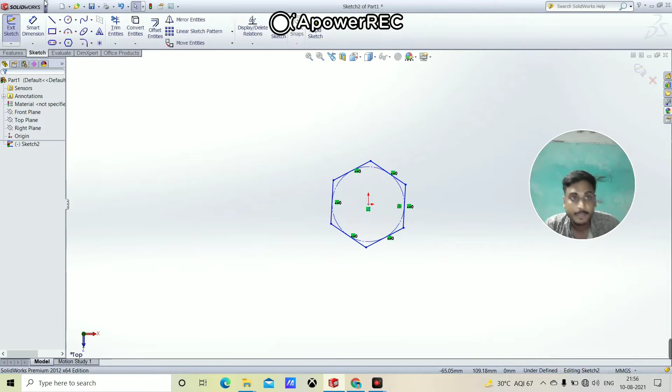At first I have to go to the top plane and select the sketch. I am selecting the hexagon, selecting this line and making it horizontal, then putting the smart dimension of this tool at 19 mm. Okay, it is done.

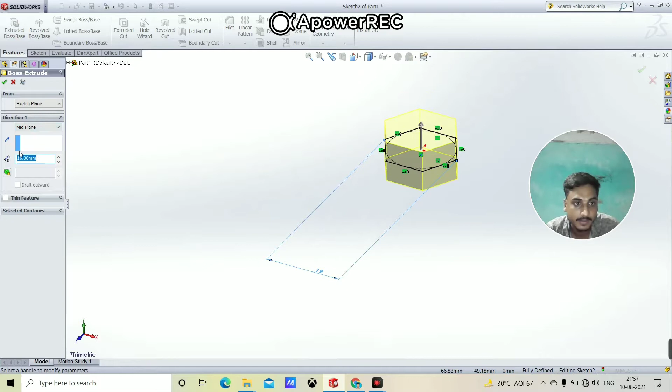Now I am going to extrude it, extruding from blind to mid plane, and the dimension is 7 mm. Okay, it is done.

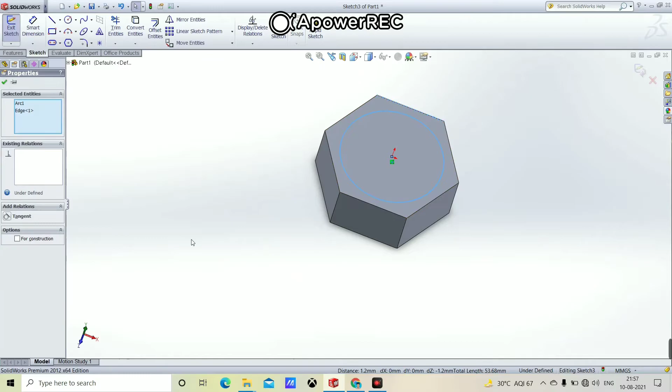Now I am going to the sketch option at this point. I come to the point and make a circle. Now I am selecting the circle and the line and making it tangent. Now I am going to extrude cut and clicking the flip side to cut.

Then click on the draft tool and put it at 60 degrees. Now you can see it.

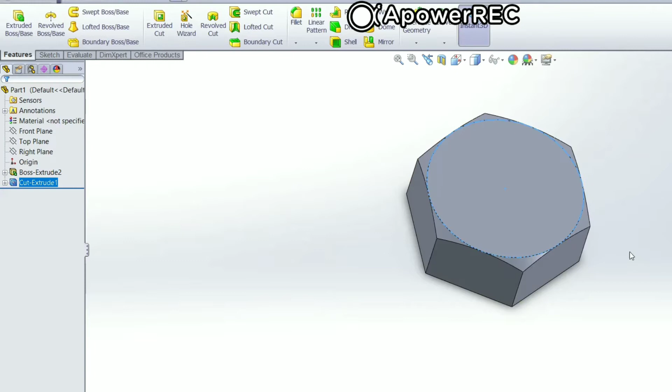It is done. Now I'm going to the back portion and sketch. After sketch, I'm putting a circle inside it and giving it a dimension of 10 mm.

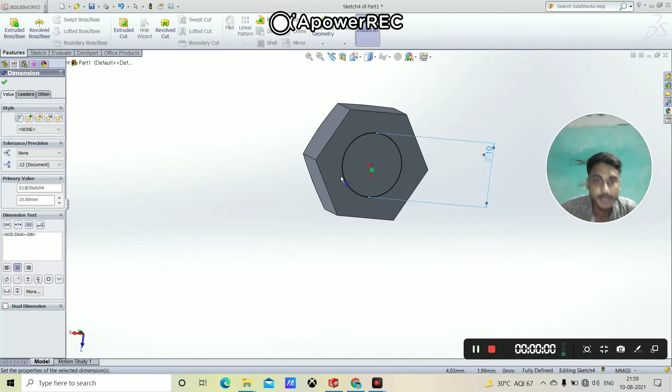I'm going to extrude it. Extrude 45 mm. Okay, it is done at 45 mm.

Now I'm going to the chamfer tool and making a chamfer of 1.5 mm. Done. Now I'm going to put a fillet at this point, 1 mm fillet.

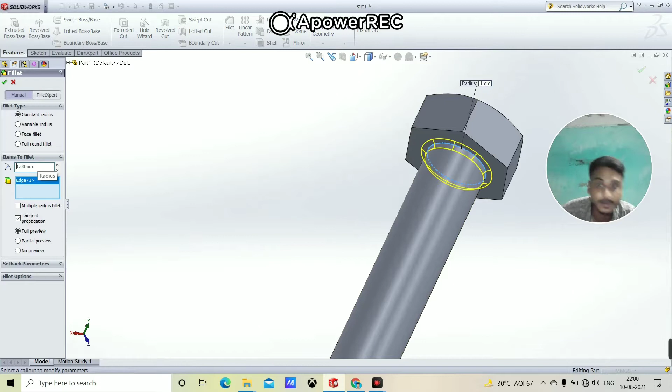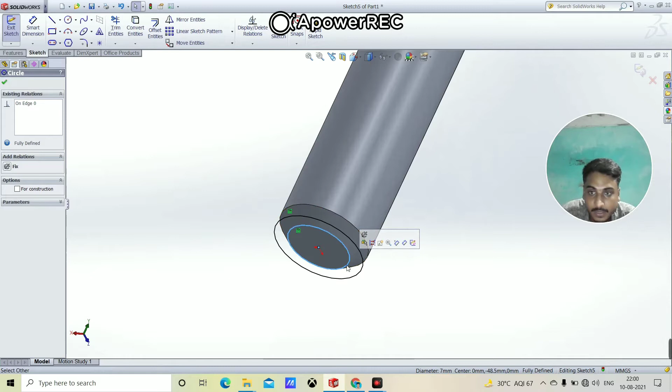Next I have to draw a sketch here and make a convert entities of this point. Okay, done. I mistakenly drew this, not a matter, trim it. Now I have to draw a...

Now I'm going to draw a helix here. I have to draw the helix at height and revolution. Height is 30 mm. At first I have to reverse it and put the pitch of 2 mm. Oh no.

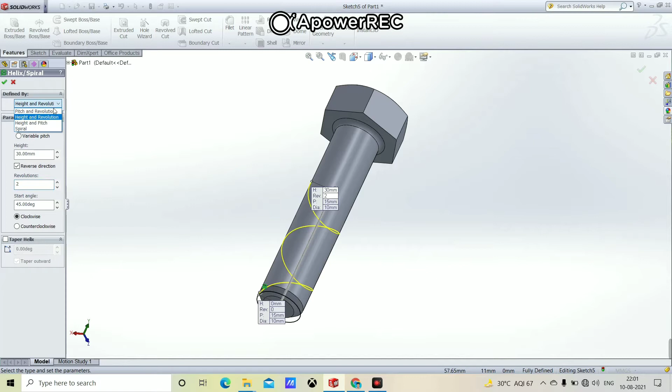I'm making a mistake, height and pitch, sorry. A pitch of 2 mm. Okay, done, so the helix is done.

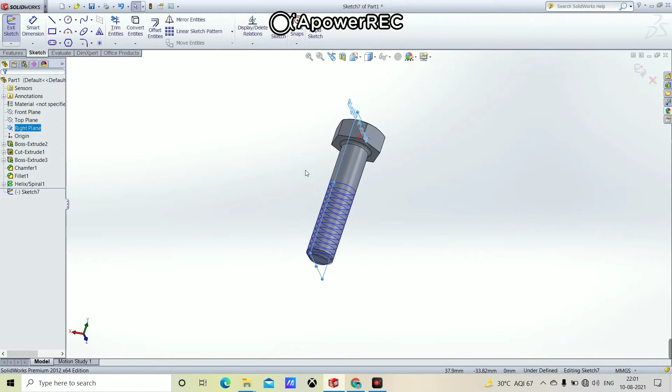Now I have to go to the right plane. Now I am in the right plane. I came to the right plane option and normal.

Now I have to draw another hex of 3 and draw it here. Okay, it is done.

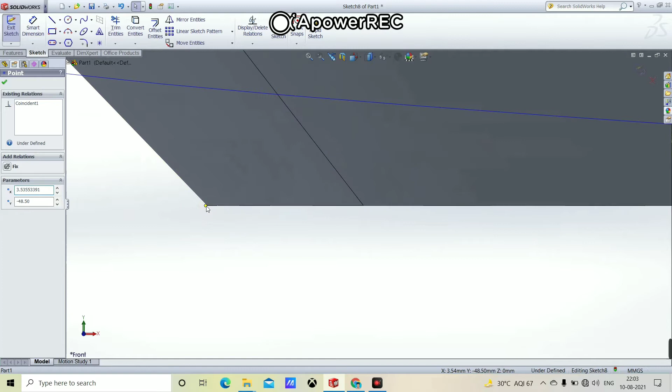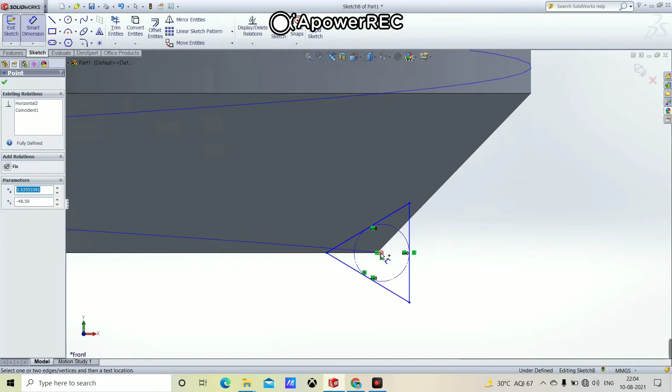Next, please select the point, this point, make it horizontal and this point vertical, and put the smart dimension of this point. Now put this dimension at 1.5 mm. Okay, it is done. Exit sketch, sweep cut, select the helix.

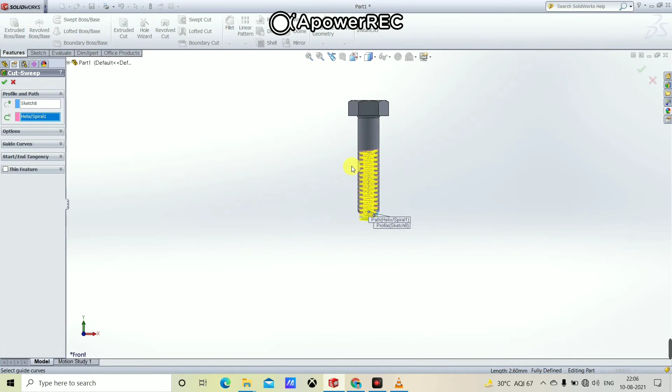Now guys, you can see the helix, and now I am going to sweep cut it. So let's start.

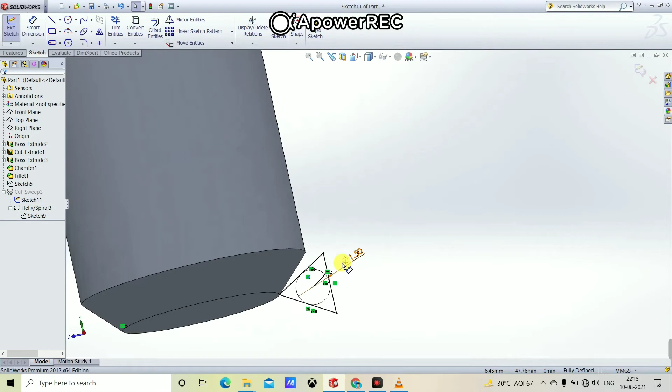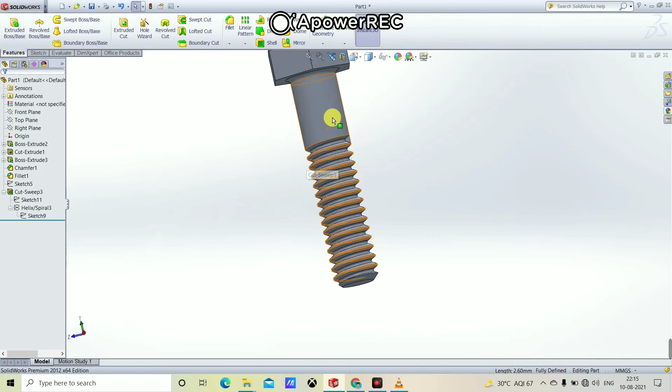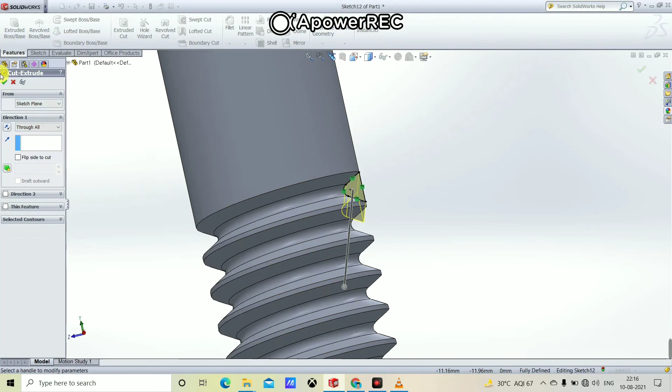Now my thread is ready, and next I have to draw at this point because it is not necessary. So I have to convert entities, and next what I'm doing is extrude cut, extrude cut at the point of through all. Click at right. Okay, now it is done.

Now I have to save it. At first I have to hide this drawing. Okay, done. Now I am selecting the material.

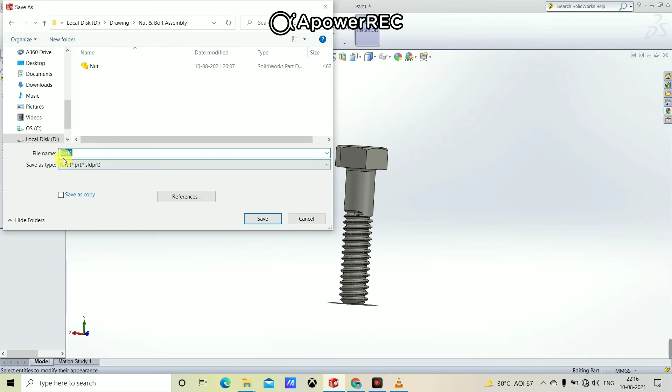Metal, steel, and carbon steel. Okay, done. Now I'm going to save it. I'm saving this as nut bolt assembly, and this is the bolt.

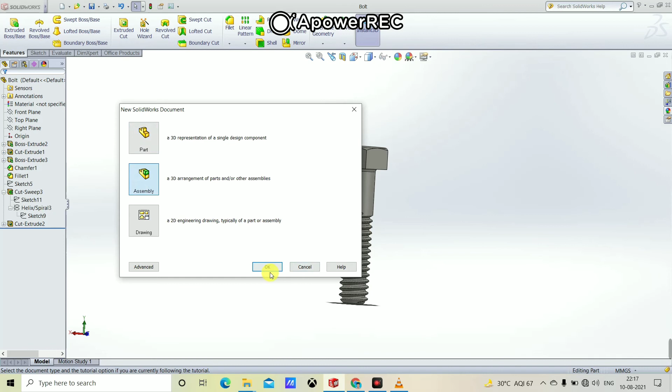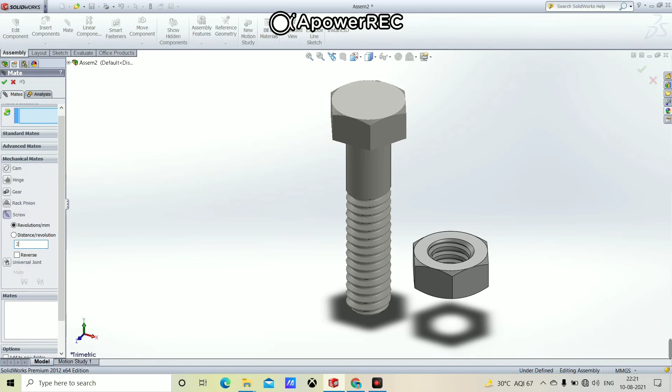Okay, assembly. Now you can mate it. Do mechanical mates, screw, pitch distance 2, and then select the faces, this face and that face. Okay, now it is assembled.

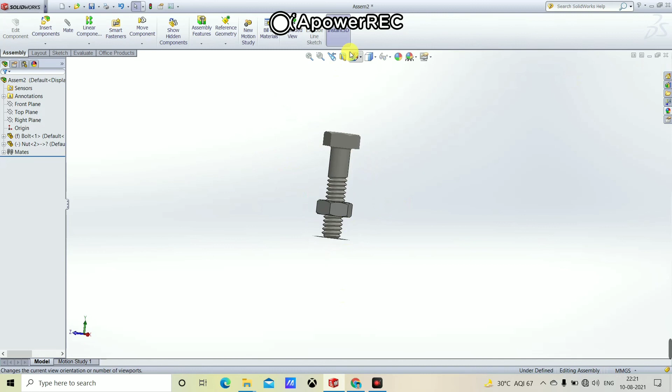See its cross-sectional view, cross-sectional views. Okay guys, you can see it.